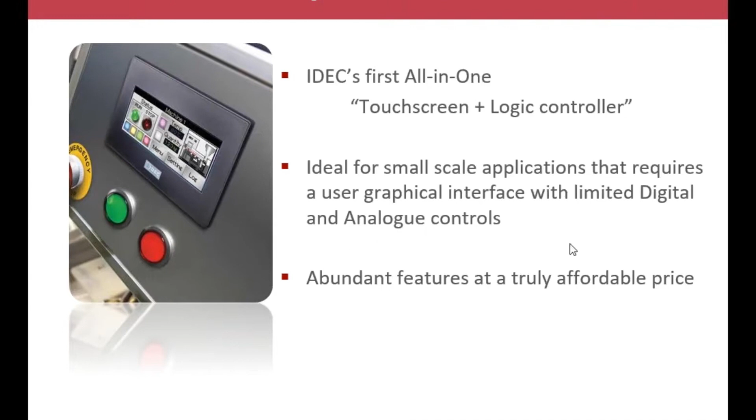If you take a look at the product, it looks like the image that you see on your screen. This is the front face, and it's available in 3 bezel colors: silver, light gray, and dark gray. In Australia, we stock the dark gray product, but we can specially order silver and light gray if needed.

The screen is available in two types. One is an STN monochrome type with 16 grayscale. Then we have a color unit, which is the most popular, with 65,000 colors and a TFT color screen. The recommended operating temperature for this product is -20°C to 55°C.

The screen comes with 5 megabytes of screen memory, and for your graphical programming there are over 7,000 symbols and factory images included in the software, which I will show you later on. It has an IP66F water and oil type front face, and Class 1 Division 2, all the worldwide ratings for this product.

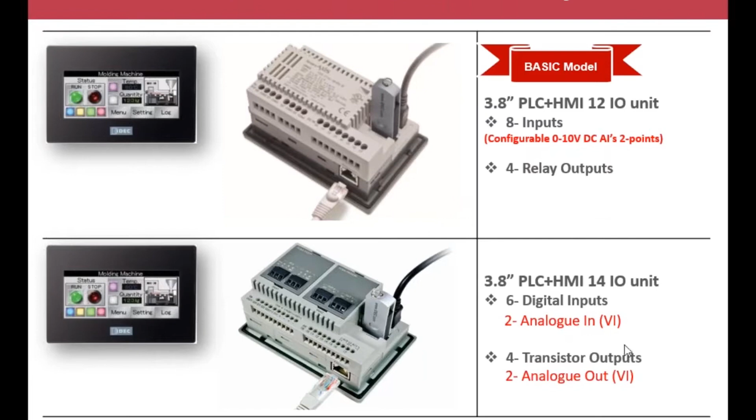So let me quickly show the difference. Looking at the back of the screen, the PLC part is right here. I hope you can see my cursor moving. The 2 analog inputs in the basic model are I6 and I7. By default they're configured as digital inputs, but in software you can configure them as 0 to 10 volt analog inputs. So a total of 8 inputs, 2 of which can be configured as analog.

For the outputs, you have 4 relay outputs with 2 amp switching capacity. So that's the basic model, which is very popular in Australia. Many of our customers have good things to say about it because of the features, reliability, and all the approvals we have for this unit.

Down below you can see the difference. The higher end unit has 2 dedicated built-in analog outputs, 0 to 10 volt or 4 to 20 milliamp, and 2 built-in analog inputs, 0 to 10 volt or 4 to 20 milliamp. These are dedicated; you don't have to do anything in the software like in the first case. They're ready-to-use analog inputs and outputs.

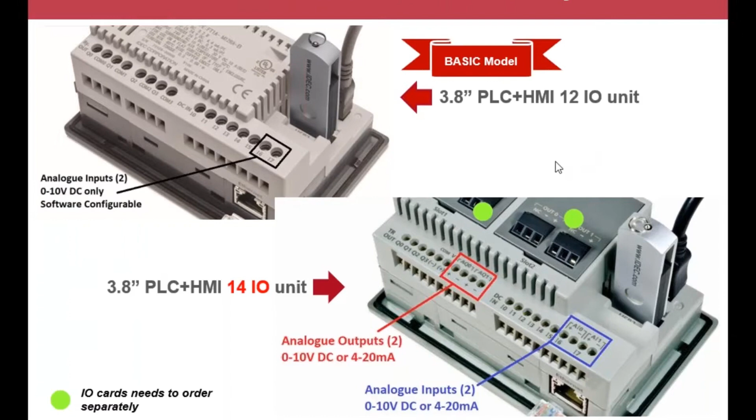In addition, you can see in this small unit, we got so many features built in. This is what I'm talking about: communication ports. We got an RS-232 or RS-485 port built into the unit, which can be used for serial communication with other devices, for example a Modbus device or another PLC. It doesn't have to be an IDEC PLC. It can be a non-IDEC PLC, like Omron or Schneider. We have the drivers built in, so it will communicate with any serial device.

In addition, you have a USB mini B programming cable, you can see in black color here. This is not a special cable. You can buy it from anywhere. Of course, you can buy it from IDEC, we recommend that too. But you have to make sure it's USB mini B type.

Also, there's a USB A port that can be used with an external memory stick, a plug-in type, for data logging, recipe storage, and also program transfer. For example, you can send this USB stick to your customer, and the customer can plug it into his FT1A Touch, and it will automatically transfer the program from the USB stick to the FT1A Touch.

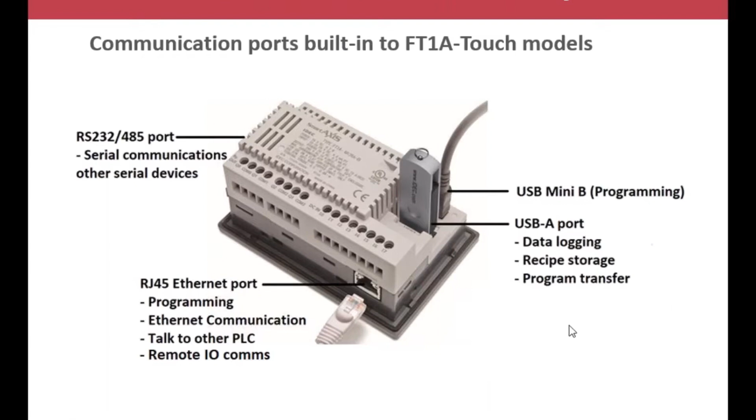As for the software, we are using Automation Organizer. As some of you may know, Automation Organizer has everything built in to program our IDEC normal PLCs, normal HMIs, and also the FT1A range of PLC and FT1A Touch. If you're using FT1A Touch, you have to make sure that you use WindO/I-NV3, which is dedicated for programming FT1A Touch, which I will show you later. So this is the brief introduction of our FT1A Touch model.

So when you're programming it, make sure you use WindO/I-NV3. You can design your GUI, the graphical user interface, and the ladder part is also built into WindO/I-NV3. So you don't need to separately use WindLDR. Actually, you should not use WindLDR separately. You have to make sure everything is done inside WindO/I-NV3.

In today's software demonstration, I'm going to show you a simple application, how we can create a screen quickly, and also tackle the ladder part, how to program the built-in PLC using WindO/I-NV3 software. The model I'm going to use for this webinar is our basic model, FT1A-C12RA-B. C stands for color, 12 I/O basic unit. As I told you before, this one's got two analog inputs, software configurable, 0 to 10 volt. The resolution is 1000 points between 0 and 10 volt DC, which is more than enough for most basic applications.

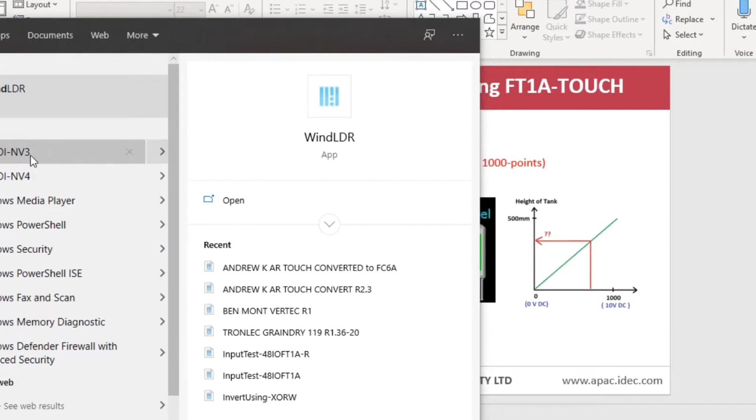If you have the software installed in your PC, just go to Start and type in WindO/I-NV3. Right here you can see it's normally a green color icon. You can copy this to your desktop if needed. So click on it. It'll ask you about an update check, no problem, say yes. And this is the screen that you see once you launch it.

As usual, the first thing you need to do is click on the top left-hand corner and create a new interactive project. Click on it, and then you can select wherever you want in your PC to save this project. Let me put it on my desktop, and you can name the file training or whatever you need. Let's say training and say next.

And this is very important. You have to make sure the hardware that you're using actually matches what you select here. Of course you can change it later, but to prevent any unnecessary issues, it's better to just select the right model from the beginning.

As I told you, I'm going to use the default model, which is FT1A C12, the color 3.8-inch FT1A Touch, and this is the higher end model, the 14 I/O. You can see the details on the right hand side when you select each model. This is the monochrome 12 I/O model, and this is the 14 I/O higher end monochrome. These days, 98% of the product that we sell is color. So I will use the basic color C12 model and say next.

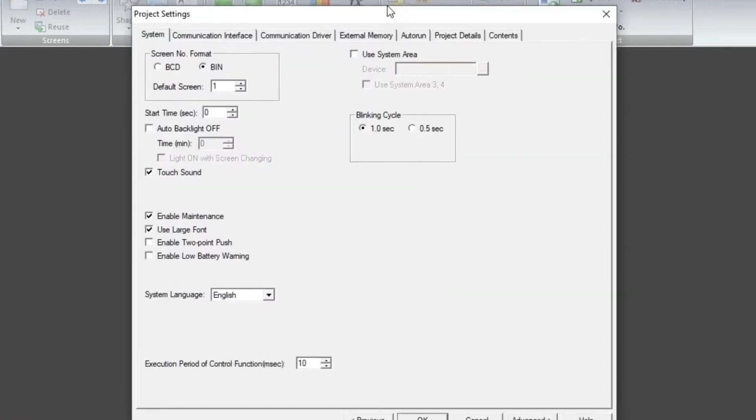For this instance, I'm going to use IDEC System because there are no external devices, since the PLC is already built into the FT1A Touch. So I select no external devices and say next. This is the port setting. Mainly what you have to worry about is the communication interface part. I will show you that later because we can access it anytime. So just say okay here.

And now we are ready to create the screen. It takes a little bit of time because I think my PC is a little slow, so it'll come up soon.

All right. So as soon as you see the screen, you can see it's already asking you to create base screen number one. You can put a title if you want; this is optional. You can put a title so you can distinguish it later: home screen or anything you desire. The option screen you can also access anytime, but I will leave it like this for the time being. Just say home screen and say okay.

All right. So this is the screen area, you can see in black color. Every item that you put inside this, like buttons or anything that you create, you have to make sure you put inside the black area. You cannot put it outside. Of course, it will give you an error if you do that, but it has to be inside the area. You can zoom this higher or lower.

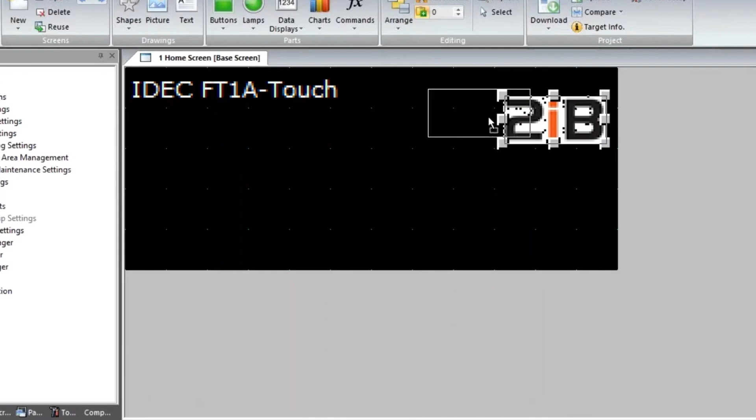Right. Yeah, maybe something like that. That's not a good picture, but of course we can make it better if you have a company logo or whatever. See, this one is saved with a white background color, but of course you can select any picture from your picture library if you have your logo. Now, one thing you have to be careful about is the resolution has to be within this range, 240 width by 100 pixels height. As long as the picture is within that range in pixels, no problem. You can show any image. So I will just get rid of it for the time being. Okay.

All right. So now, as I showed you before, I'm going to start building this screen. First of all, inputs. So let's look at the inputs. Again, I can put some text in there to show these are inputs or sensors or whatever you want to call it. Input status.

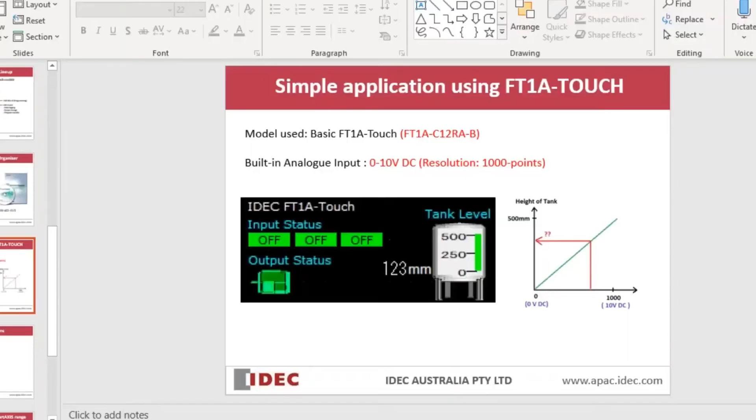And I can change the color of the text here. It doesn't have to be black and white all the time. You can dream in color. Okay. So color, any color. Get rid of that and say okay, input status. And then the next thing is output status. Once you have this, I can Control C, Control V, copy paste it. You can put that down below here. Let's say output status. So I have the text already there.

So now let's look at the inputs first. How do you display the inputs from your PLC? These inputs here, let me see here. The inputs in the PLC, how can I display the status of that? You don't need to have any code. I mean, in the ladder, you don't need to have any code to display input status. Okay, you can just directly show the input status on the screen. So how do you do that?

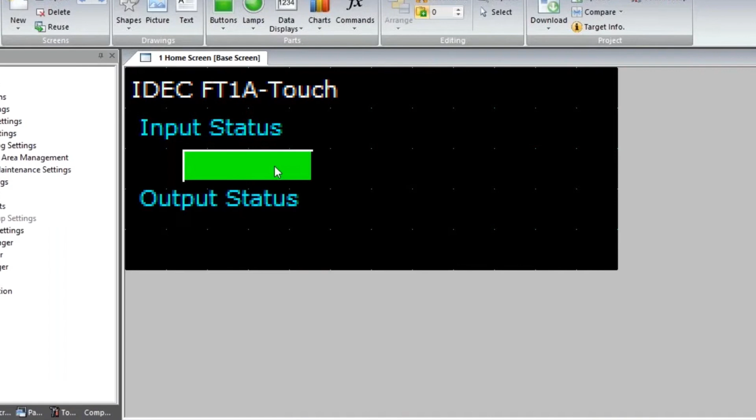Normally, on a normal control panel, you'll have a pilot lamp, right? So, all right, let's go here. You have buttons. Lamps, pilot lamp. You can select it, drop it on the screen. We will resize this later. Double click on it. As soon as you double click, you go into the trigger condition,

and then obviously I know what the IDEC designation for inputs are: I000, I10, I15, not I18. Okay, because it's octal addressing, so I0 to I7, I10 to I17, like that. But if you are not sure, you can click on this icon right here, right next to it. It will bring up the device address settings.

Yep, internal. That means internal to this touchscreen, because the PLC is built in. So internal, and then device type. You can select here from any of these devices. In this case, I'm interested in input. Control function input 0. All right. So once you do that, that particular pilot lamp is now wired to I0 using software.

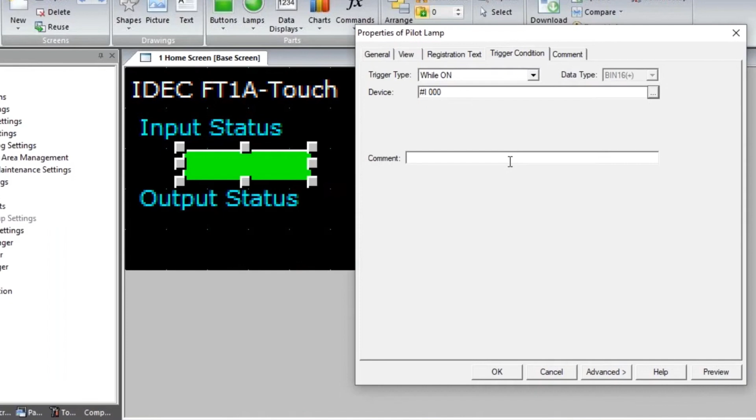Okay. Now, next thing you would maybe like to do is put some text inside here, a legend, to show maybe on-off status of that particular input. So you can say I0 on, sorry, this is for off. You can see off there. And then you can set it by state. For on text, you can put I0 on there.

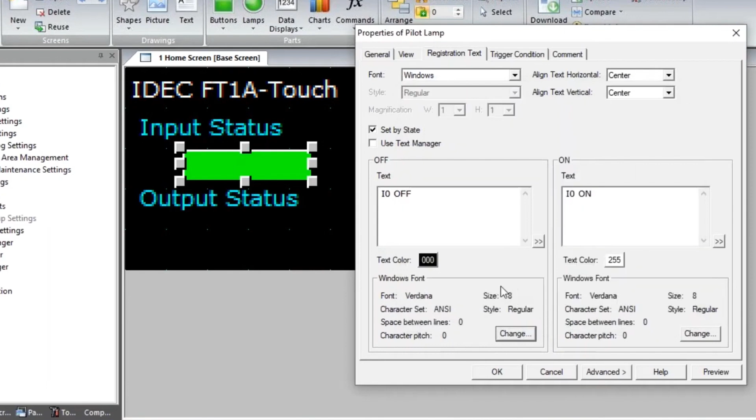Again, here also you can change the font for each of these. So you can change the font anytime. Okay. So I will leave it as it is. And that's basically what you need to do. Now, once you download this project to the hardware, I will show you later, to FT1A, whenever you apply 24-volt DC into I0, that means here into one of the inputs here, that will show you the status as we put already, I0 on, I0 off, and also it will show you under view on off the color.

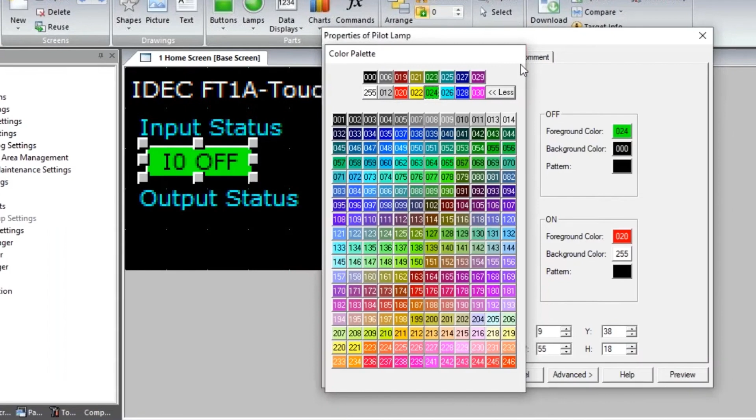So when it's on, the background will change to red. When it's off, it will change to green. If you don't like these colors, of course you can change it. Off color, you can select any color you want. For on color also, you can select any color you want. I will leave it as it is, because normal standard is on is red, off is green. Okay, that's basically what you need to do.

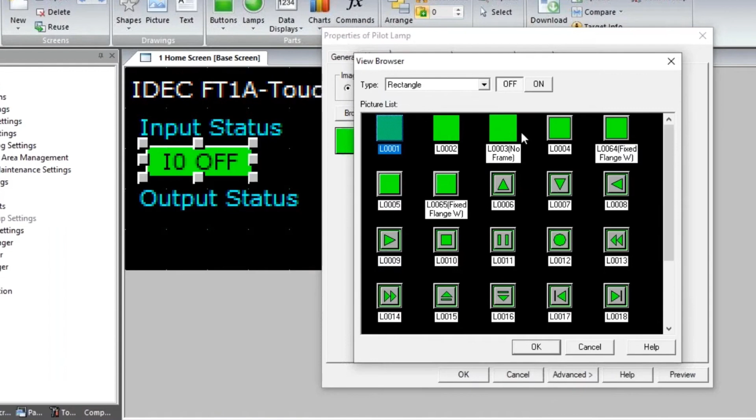And in addition, you can change whether you want it to be like a rectangle or circle or whatever. You can go here under browse. You can say, okay, rectangle, special one, or circle. So anyone you can select. I will select rectangle, and without any frame, say okay, and you can say okay now. See, right there, very simple. You can go back anytime and change any of the settings that we did.

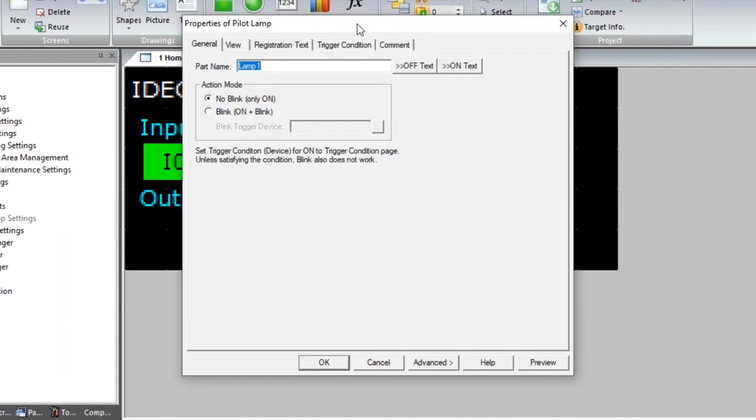Okay, so once you have one input set up, you can just select it, Control C, Control V, copy paste, go back to the second one. Obviously, I want to change this to a different input. Instead of I0, let's say I1, okay. And then once you change that, you have to change the text. I1 off, I1 on, done.

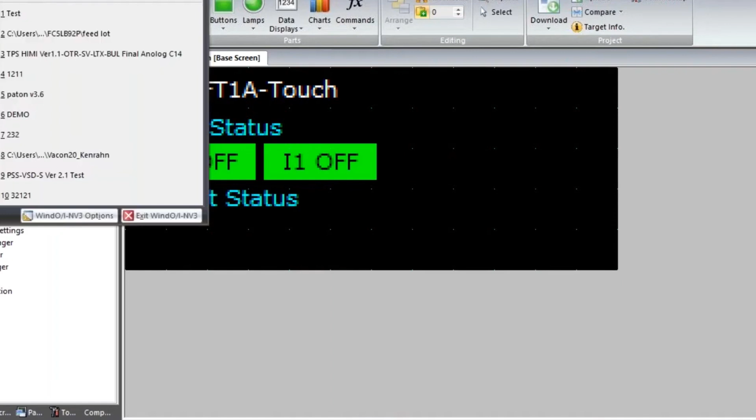So now you can see how easy it is, and it doesn't take even a couple of minutes actually once you do it. Once you play with the software, it's very easy to build the screen. All right. So far we haven't actually done anything in the ladder part of it. This is totally done on this GUI. Okay, so make sure you save it. You can click on File Save, or just simply click on that small diskette icon there. It'll save the project.

All right, how about the output? Output, all right, I'm going to trigger the output using, let's say, one of these inputs. Okay, so when you want to do that, that means, yes, now we need to put the ladder in. We have to program the ladder part of it. So what I'm going to do is I'm going to tie this I0 to trigger Q0. Q is for output, and then I1 maybe for another output, Q2 or something.

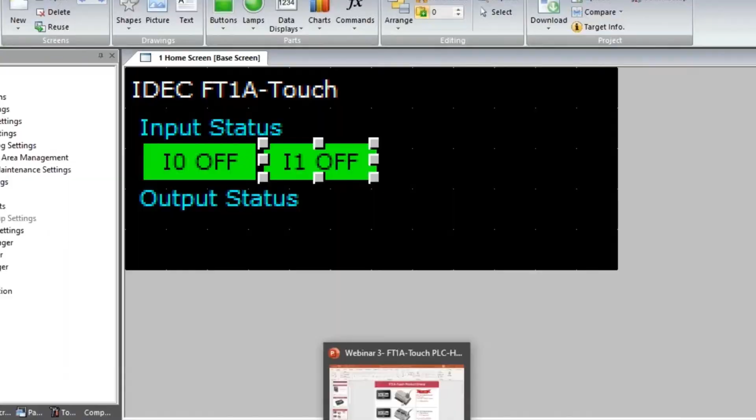Just like I showed you before in this screen here, right there. I have one output here, but I will put two outputs to see how easy it is to show. You can actually use a button directly right into the output. Double click. Let me show you again. So it's under here, push button. So button, bit button, and then double click on it.

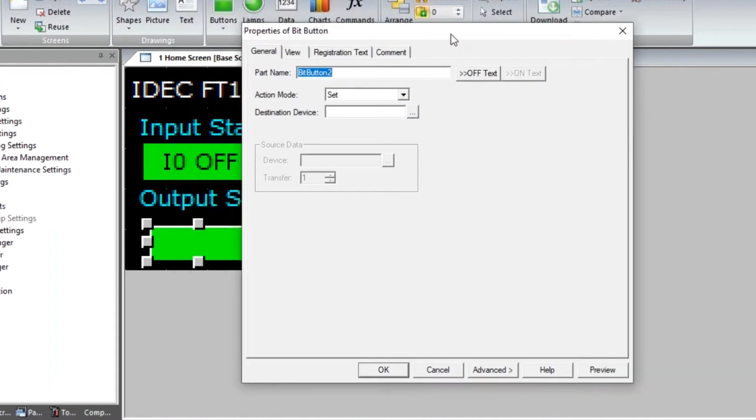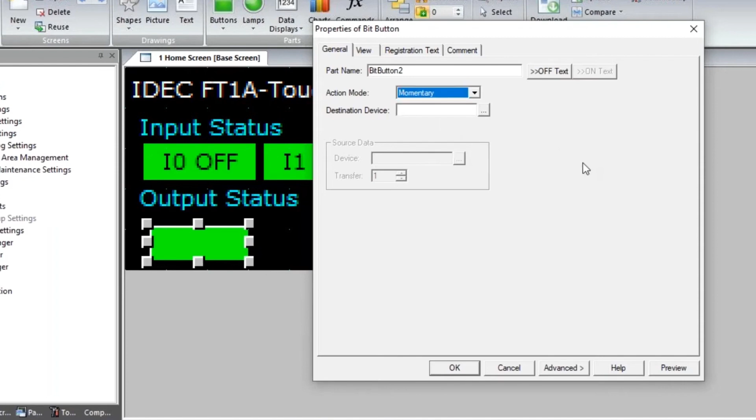And obviously, if it's a bit button or normal button, you have to select the action mode, we call it, whether it's a set or latch, unlatch, momentary, alternate, or whatever you want to do. So in this case, I will say select. Most of the time you use momentary. All right, we selected the button and then selected the action as momentary, and then where is it writing to? Destination device. Which output you want to toggle or momentary action is. You select from the icon there.

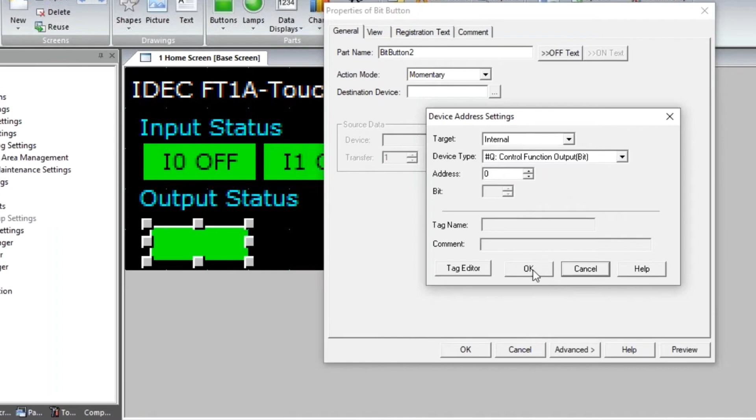Again, it's internal. The device type you select. In this case, last time we selected I0 for this one. That's for the pilot lamp. This one you select Q, control function, output bit. In IDEC language, input is I, output is Q, internal bit is M. So you can see right here. So you can select output 0, Q0. Once you do that, it will write directly to this output. So when you download the program, when you touch this area, it will trigger output 0, the first output.

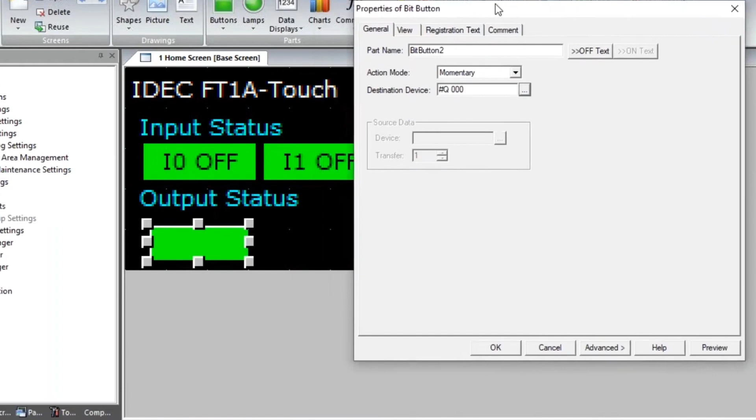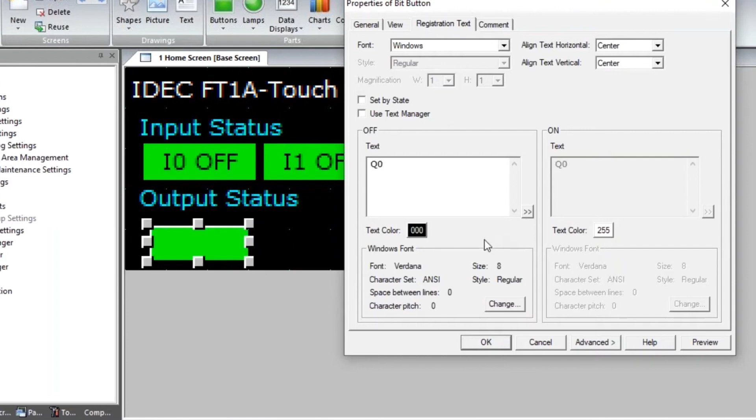And then similar to what we did with the inputs, you can go into view, change the button type if you want. If you don't like this, you can select anything you want, any shape you want. And then you can put some text inside, Q0, let's say. All right. So that's how you can put the button. Anytime if you don't like that, you can just go and change it to a different shape. So this is like a button. You can make it bigger if you want, any size you want. But because of the small real estate I got in this, I'll keep it like that.

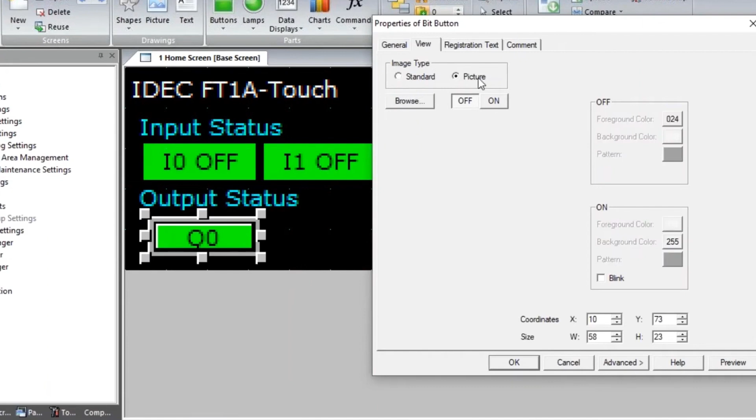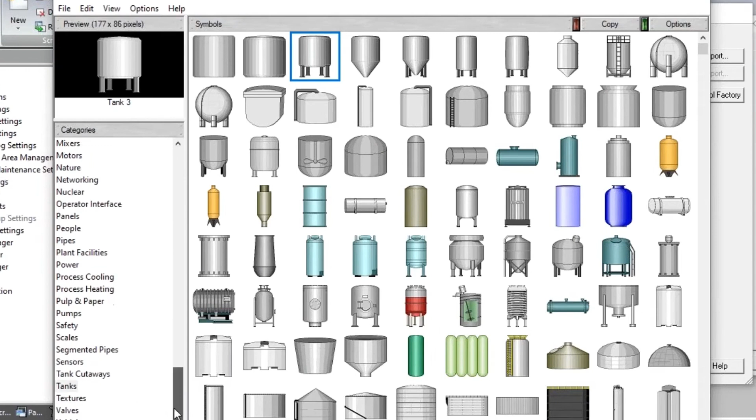Or I can bring in and show some image. So how do you do that? Double click, view. Instead of standard image, you can select picture and then go into browse and then go into the Symbol Factory, which has 7,000 symbols built in. So click on it. Let me say this is a motor or something like that. You can select any image actually. So let's say I'll select the first one. All right, motor. Before you import, you can actually change the background color, the motor color and everything right here. You don't have to do anything else.

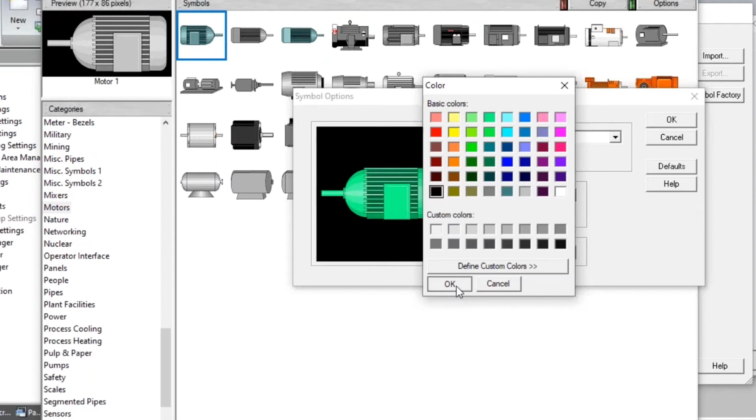So before you copy that into WindO/I-NV, we go to options. I'm going to show this motor in green color when it's off. Background color also you can change, but my background color already is black, so I'm gonna leave it as it is. Or if you have a white background, then you can select white background in your case. So I'm gonna leave it as black. Say okay. That looks good, and then say okay here, and then copy that image. Now you have the image right here. Whatever changes you did, you can see it right here. Copy that, and import it inside of your project.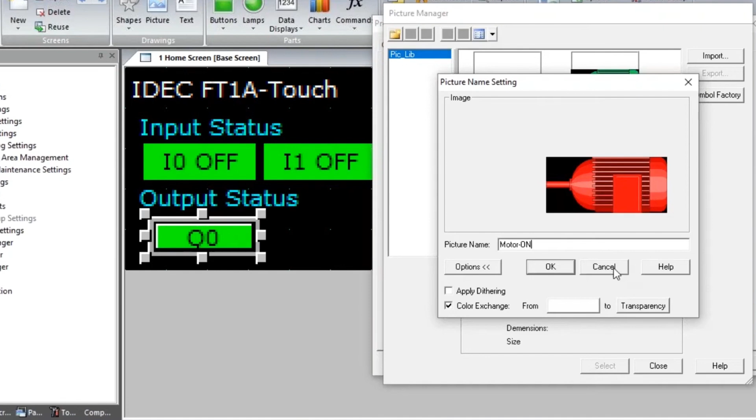So I'm going to say this one is motor off image. And because you are tying that to an output, there are two states, off or on. So you have the off image. Now you can do another one in Symbol Factory, and it actually remembers the last one that you picked. So just change the fill color, this time to red, say okay, looks good, copy it, and this time I'm going to say this is the on image. So I have two images now, so I can select one image for off. For on image, you click on this button here and browse again, motor on, select. So now we have two images.

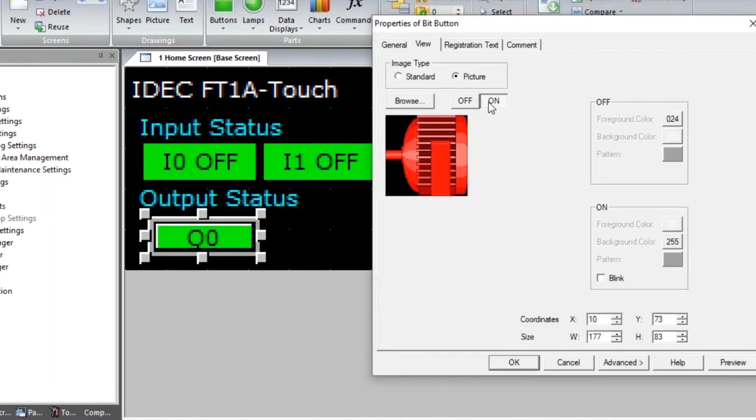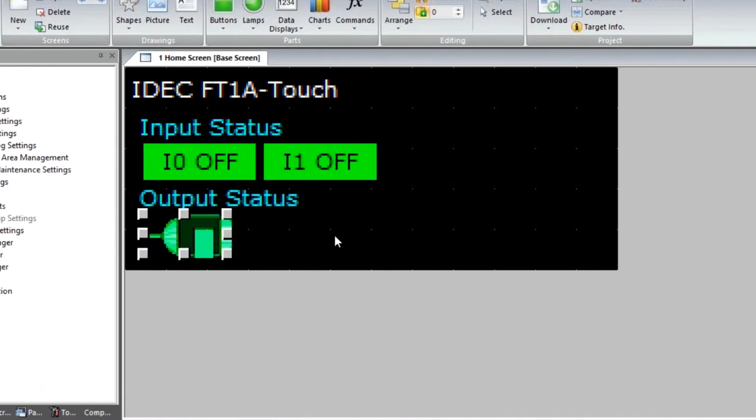And then I can get rid of this Q0 if you don't want, and just say okay. That's your image of the motor, very big one. So you can resize this the way you want and put it there. Now, when you touch this button, it will directly write to output 0. Similarly, you can just copy this, Control C, Control V. If you want to write to the second output, you can simply change this here to Q1 instead of Q0, or of course go here and select Q1. See how easy it is to program. Very simple.

All right. So that's how you can show the input and output status. So when you touch this area after you download the program, it will trigger that output. So we haven't done anything in the ladder yet. You can directly write into outputs.

Okay. So now what I'm going to show you is how to do the tank level. For this, I'm going to use the ladder part of it. So you know how to access the ladder in FT1A Touch. So the height of the tank is 500 millimeter. Let me show you again, 500 millimeter, half a meter. So 0 to 1000 is the internal. So what you do is go back to NV3.

Now I have to access the ladder. How do you do that? Right here under project, you can see control function with a normally open contact image. Just double click on it and it will bring up the ladder program for you. Get rid of the end, don't need that. All right, first thing we need to do in the ladder is, as I showed you previously, it's software configurable, right? Otherwise, it's normally set up as a digital input.

So what you do is in ladder, go under configuration, input configuration. You can see here I6 and I7 are set up as digital. So you can change it to analog. You can change both to analog if you want, or if you are using only one, you can select whichever input as analog. I'm going to use I6 as analog. That's all you need to do there. So once you select that one and download the program to the FT1A Touch unit, it knows that I6 is set up as a 0 to 10 volt analog signal. So you just say okay there.

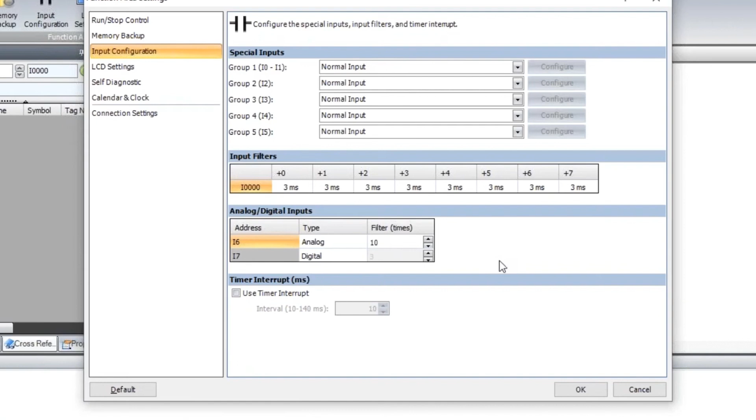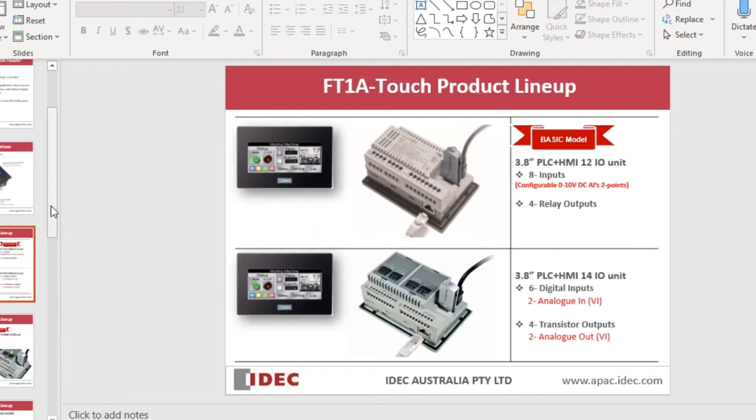All right. So far I haven't done any ladder yet. Now, how do you define this graph in the software? Very simple. Because the raw value coming in is a value between 0 to 1000 inside the CPU. But we are not interested in that. We want to show the liquid level inside the tank in millimeter. So maximum is 500 millimeter, minimum is 0 millimeter. The ladder part that I'm going to show you now will calculate the corresponding liquid level based on the voltage that you supply to the I6 analog input. Okay, so how do you do that?

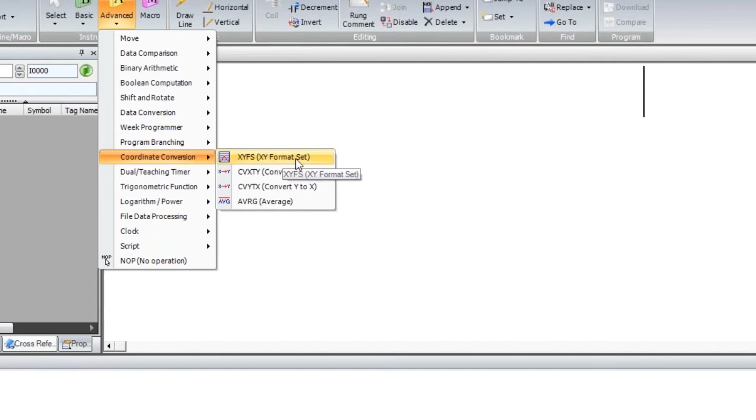Go to the ladder part. Very simple. Go to the home tab. You can see there is graph. Let me see. There you go. Coordinate conversion. Because it's a linear graph, we have to define the graph first. So I'm going to use XYFS, XY format set instruction, to define the graph first. Click on it, drop it on the screen, double click.

I'm going to say this is the first graph. You might have multiple graphs, right? And then start defining the X and Y values. X in this case is this axis here, 0 to 1000. Y is 0 to 500 millimeter. So let's go in there. First one is X0, Y0. Second one is 1000 and 500.

If you look at the graph, you can see when it's 1000, this point is 1000, 500. That's the coordinate of this point. The coordinate of this point is 0, 0. So this one is 1000 and then 500. So that's what we defined here.

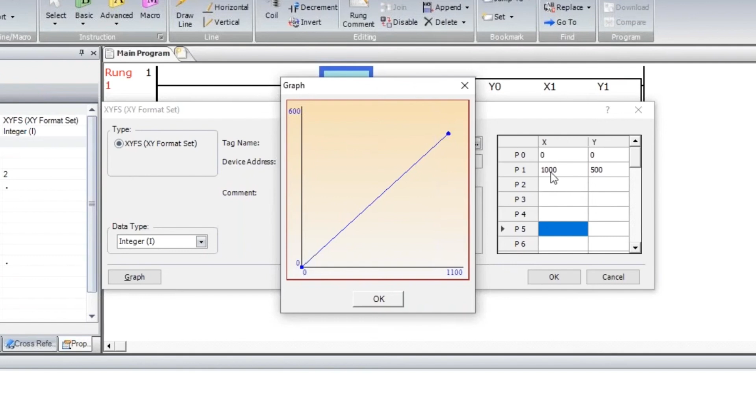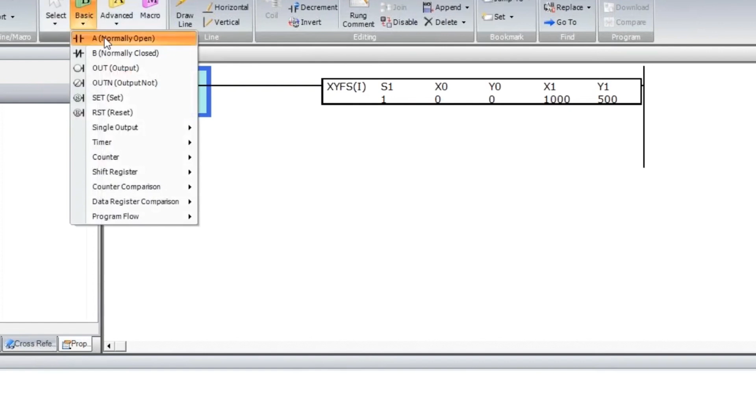Once you do that, it's already defined, but I need to trigger it using something. Otherwise, you will get an error. Always you have to have a trigger. So I'm going to use a basic normally open contact, double click, and then select special internal relay, M8125, let's say. M8125 means it's always on. Or you can use M8120. Any one of these will do.

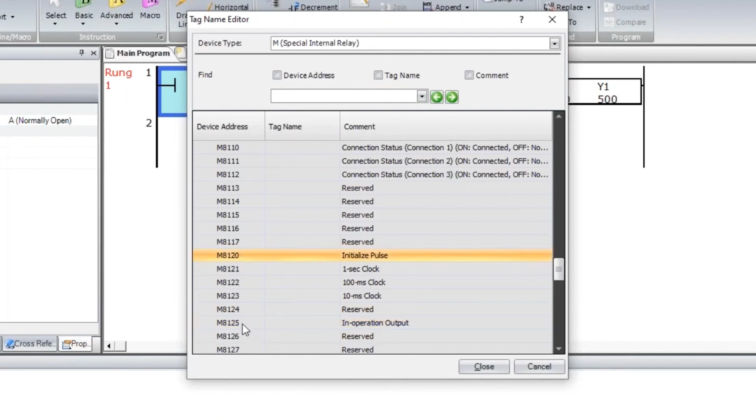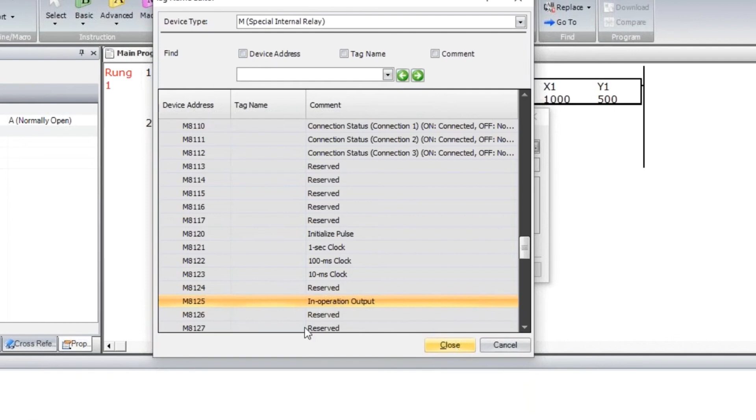Initialize pulse means whenever you first start the PLC, before the run light comes on, it will give you a pulse and set whatever settings are necessary for the graph. Or you can simply use an always on contact. So I'm going to select M8125, in operation output. As long as the run light on the PLC is on, in run status, this bit is on. So just select that one, close. M8125. Now we have a trigger for the graph.

Now we defined the graph already. Let me show you this. We said this point is 0, 0. This point is 1000, and the maximum point is 500. So that's what we defined. Now, we are not interested in this value, we are interested here. So what we need to do is look at this value in the x-axis and convert it to the y value, which is the height. So x to y conversion.

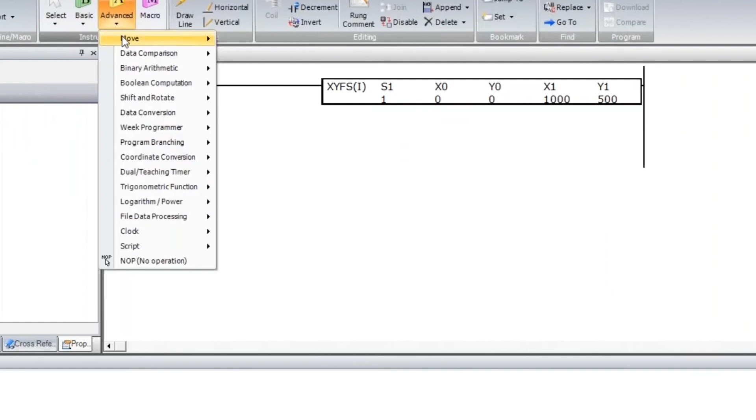So in software, what you do is the same thing. Go here, advanced. Same area under coordinate conversion, you have convert x to y or y to x. In our case, I'd use x to y conversion.

Drop it on the screen, and then the first value you put in is, you're gonna tell this instruction, look at my graph number 1 that I put in. So number 1, and then convert this value. Yeah, convert the value. Now for converting the value, you have to tell it where to read from, right? The raw value, where is it coming from first?

When you apply 0 to 10 volt to I6, the raw value, the 0 to 1000 value, will be in 8040. If you put D8040, you see already analog input value, the first channel. So look at that value and then convert it to the Y value. This one you can decide wherever you want to put. D0, this is data register. Again, I know the nomenclature, so that's why I just typed it in like that.

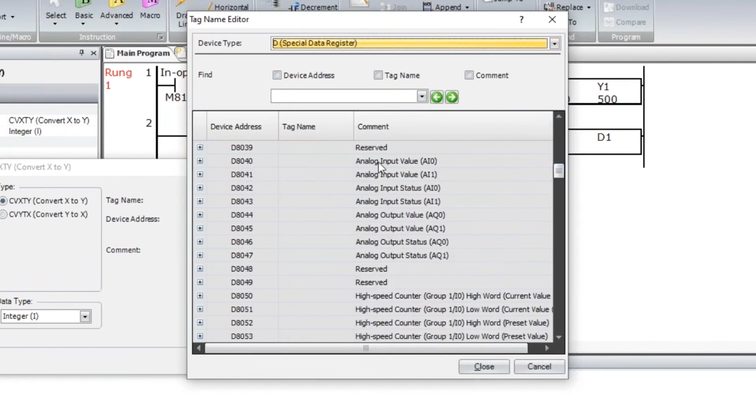If you're not sure, you can just click on it and then go under special data register, and then 8040 is in the manual. 8040 you can see analog input. That's how I selected it. This is tied to I6, and then the converted value you can decide wherever you want to put. So you can basically select any data register, normal data register. Let's say data register 0,

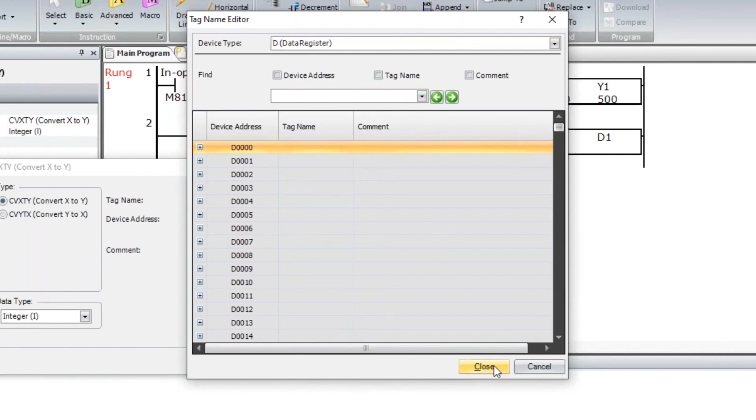and then you can put some text in there to say converted AI0. That means converted or scaled value. Right. So that's all you need to do. And then, whenever you supply 0 to 10 volt to I6 of the FT1A Touch, you will see a raw value coming here to D8040. That value is between 0 to 1000. But using this conversion, it will convert that to a value between 0 to 500 millimeters.

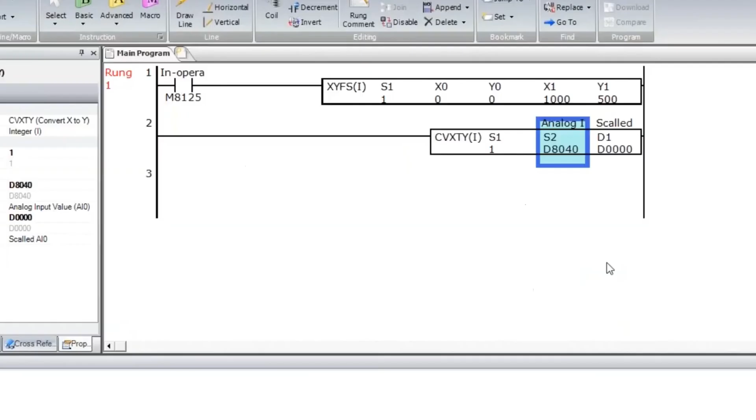All right. So that's all you need to do. Of course you need to have a trigger here too. So I will just Control C, Control V. That's it. That's the ladder for it. Okay. If you have any questions on this, I will show you later on. We can help you out with how to do this again.

Okay. So now I have all this information. Obviously, I want to display this information on the touchscreen side. So you can toggle back and forth here between the GUI and the ladder. But most importantly, make sure for your ladder you select the control function here, not the normal WinLadder. Okay. So the value I'm interested in displaying is actually D0. This is where the value is,

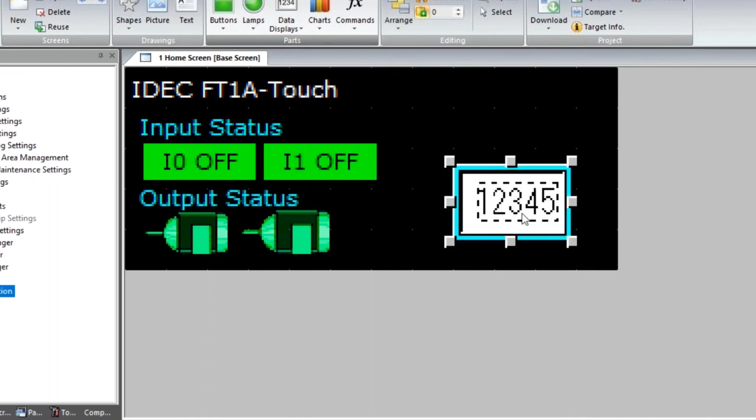scaled AI0 value, which is also the level, sorry, level in millimeter, right? Okay. So I go back here. How to display that value? Very simple. In order to display anything, you need to go to data display, numerical display, drop it on the screen, double click, and then I'm going to display device.

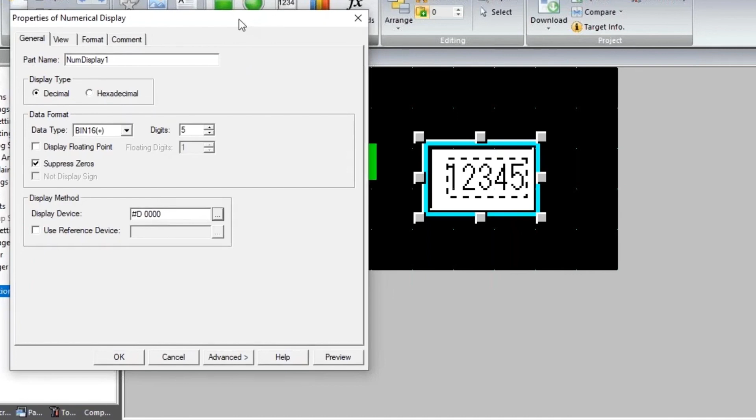I'm going to say data register 0. You can see already there, whatever comment I put in on the WinLadder side is already appearing here, D0. Select. We know the maximum is actually up to 500, so we don't need to show 5 digits. We can say 3 digits. You can preview it anytime. If you preview it, you can see how it looks.

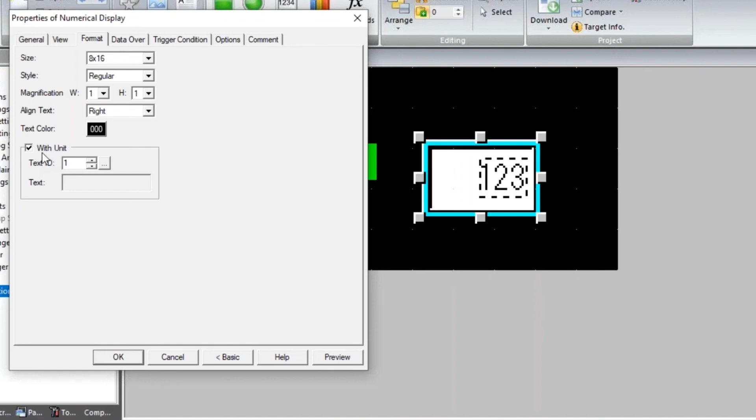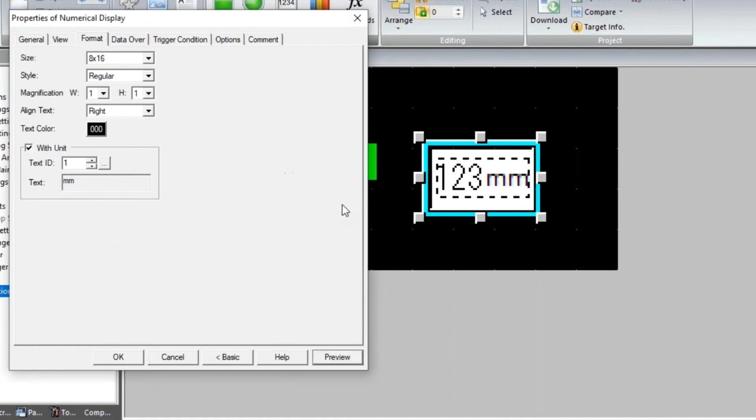And then go into advanced settings, and then go into format, and then include the unit. You can just click on it, the With Unit, and say again this one. You can select Windows font, any font you want, and this is in millimeter. Select, preview. That's how it will look. Okay, but I'm gonna get rid of this frame view. Obviously this is up to you.

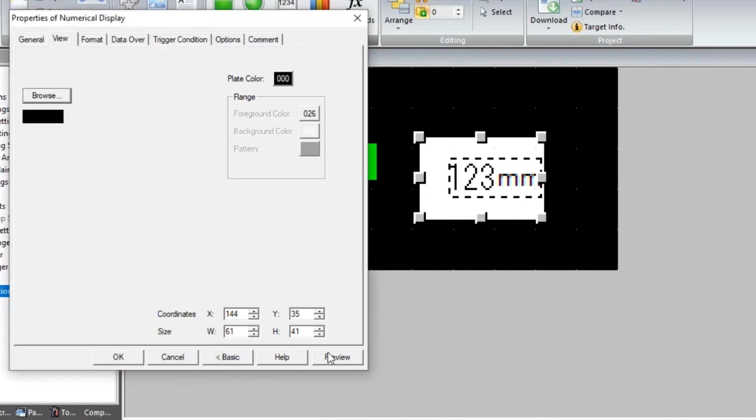Instead, under view, browse, no frame, so I can preview again. All right, that's how it looks. I'm going to change the background color, or we call it plate color, to match the background of the touchscreen area. So I'm going to change it to black. Preview. Oh, now you cannot see the numerical value, so you go back here under format. I'm going to change the text color to any color you want, white.

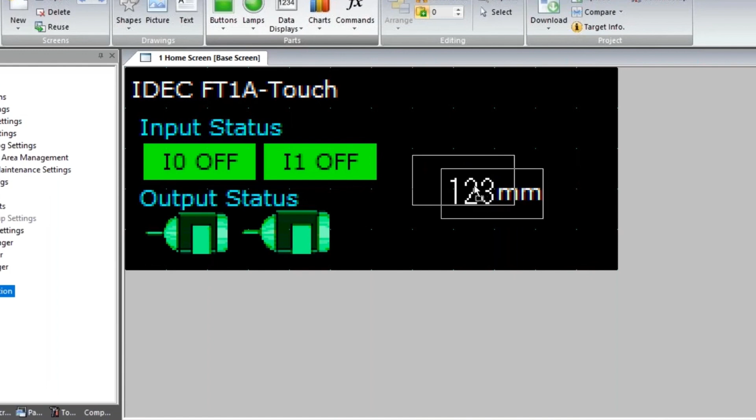Good. So now this area will show you the liquid level of the tank, because it's actually displaying the reading from this piece of code that you put into the ladder. Now I'm going to show this value also using a tank. Let me see. Picture. I'm going to import a tank, symbol factory.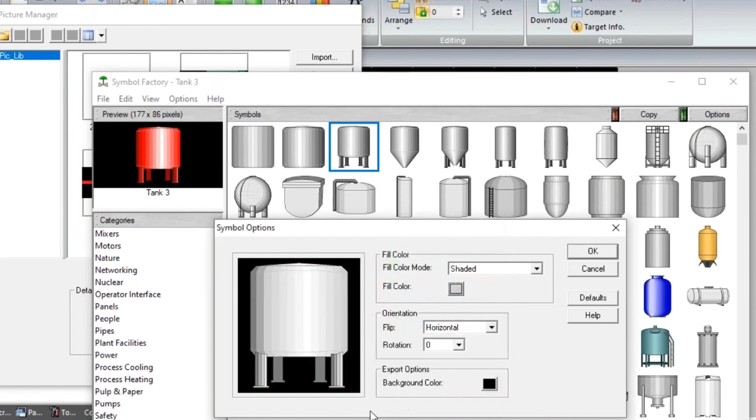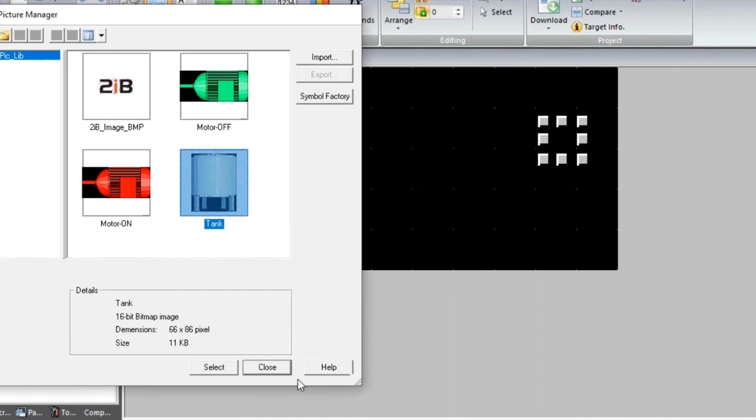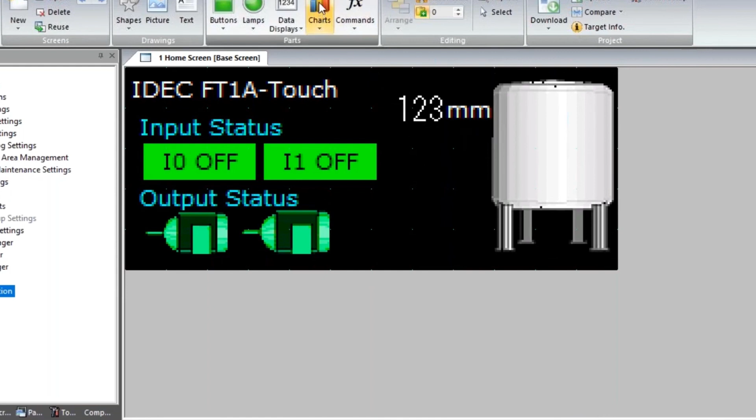There you go. Now it would be nice if I can show the level here inside the tank using a bar graph, right? That way you can see the level in green color or whatever color you want. All right, so let's do that part. Now I have the picture of the tank. I'm going to use a bar graph under charts, bar chart, drop it on the screen, double click on it. Let me move it this way so we can adjust the appearance of this by clicking on the preview button here. So the maximum first has to be 500, because that's the maximum liquid level we defined. First things first.

And then since this is a tank, I don't want a horizontal bar, I want a vertical bar. So it has to go that way, right? Vertical bar. That is done. And then going to the data tab under channel 1, this liquid level is actually in D0. So for reference device, make sure you select internal data register 0, liquid level in millimeter. Say okay. And now I don't want to show that in black color. I'm going to show the bar in whatever color you want. You can say green. And now let's click on preview.

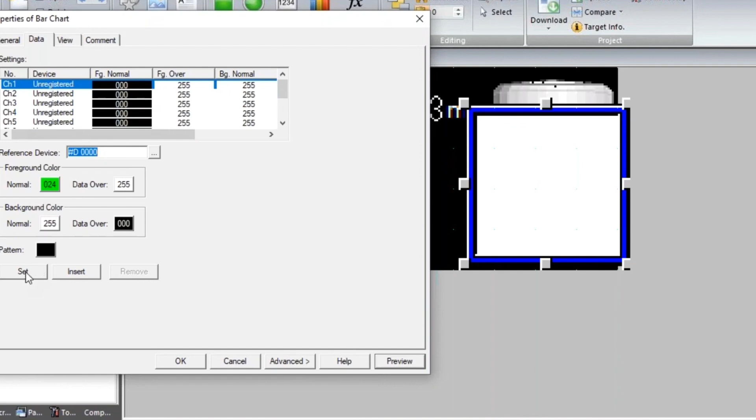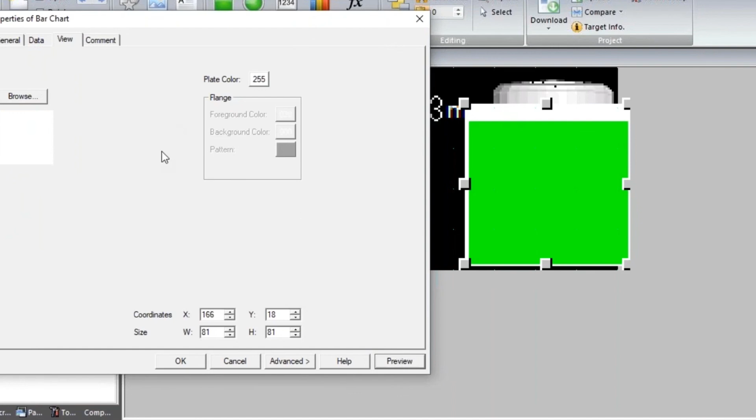Before, see, all these things are done, but then you have to make sure you click on... now it says invalid bar because it's not registered here. So it's unregistered. So click on set. Now it's registered. Now you can click on preview and you can see the bar, which will show the liquid value. And now I'm going to get rid of this frame. If you want, you can keep the frame, up to you. I'm going to get rid of it. The frame, I don't like that one. Maybe this one or whatever. Preview. Looks good. And say okay.

And then you can resize this. There you go. Now that one will show you the actual liquid level.

Give me 5 minutes, almost done. I'm sorry, taking a little bit longer.

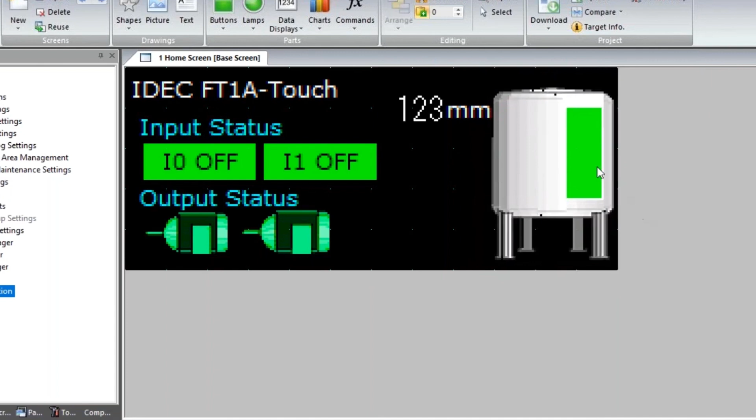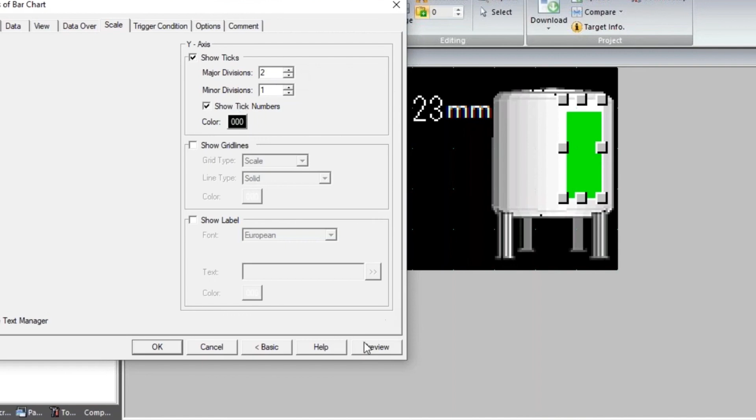Quickly, I'll finish it. Now it would be nice if I can show the scale here. All right, sorry. So yes, we can do that. Just double click on that bar graph. Under advanced settings, scale. I want to show the y-axis scale, of course. There's no x-axis to show. So y-axis, major divisions, let's say I'll put 2 and show tick numbers, preview. Yep, that will be good. Say okay. And then I will resize this. There we go. That's your graph.

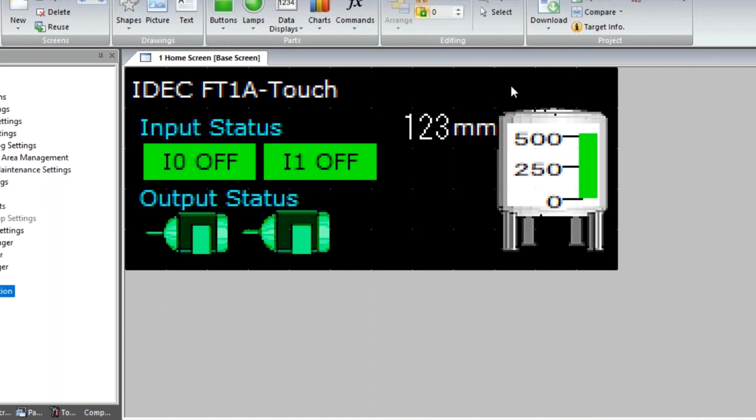Now you can actually select all these, group it, and resize the way you want. Move it anywhere you want. And then I can just put some text on top of this here. Text, tank level. In white color, let's say. Okay, good. Fantastic.

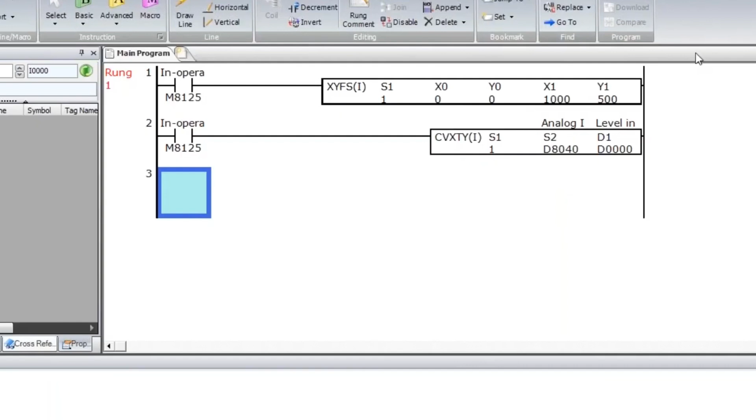And make sure you save it now. If you save this on the touchscreen side, it's going to automatically save the code, the WindLDR. So as you can see here, there is no save button. It doesn't allow you to save here. So the saving part is actually done on the touchscreen, WindO/I-NV3 side. All right. So that's all you need to do. Very simple. So these are the basic things that you normally do with the touchscreen and PLC.

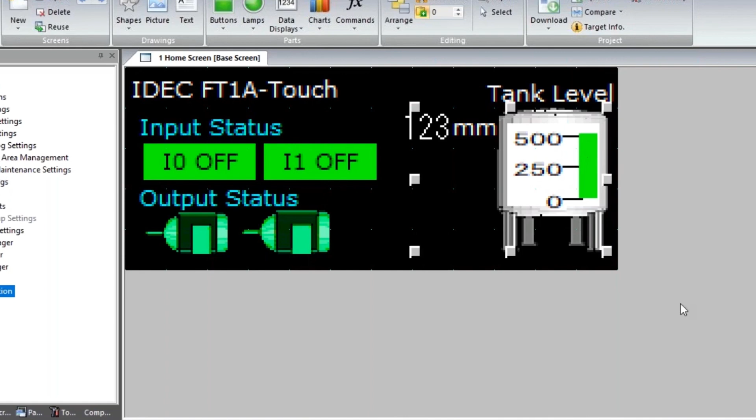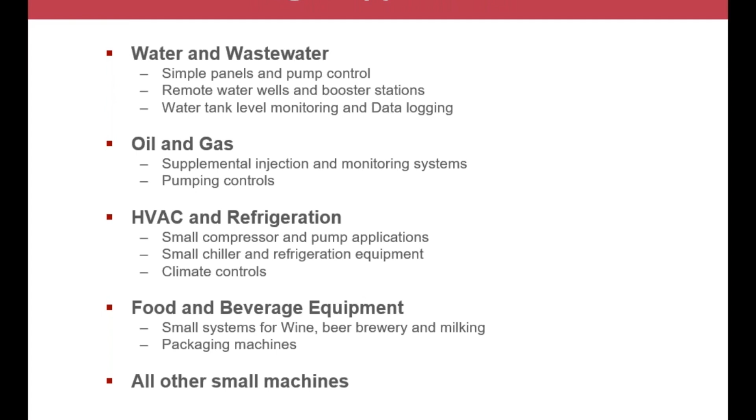Let me just share some of the applications that we have been using this for: water, wastewater plants, oil and gas, HVAC, food and beverage, any application. Basically, you can use FT1A Touch to control and display your application. And then also there are other models available in the FT1A range. The one that we focused on today is the touchscreen with the PLC built in together. But we also have the small smart relay type, we call it SmartAXIS, other range, 12 IO CPU, 24 IO, 40 IO, 48 IO. If you have any difficulty selecting the proper model for your application, you're welcome to contact us anytime. I just wanted to show you the other models available in the FT1A SmartAXIS range. So not only the touchscreen with built-in PLC, but we have separate PLC, small modules available in this range.